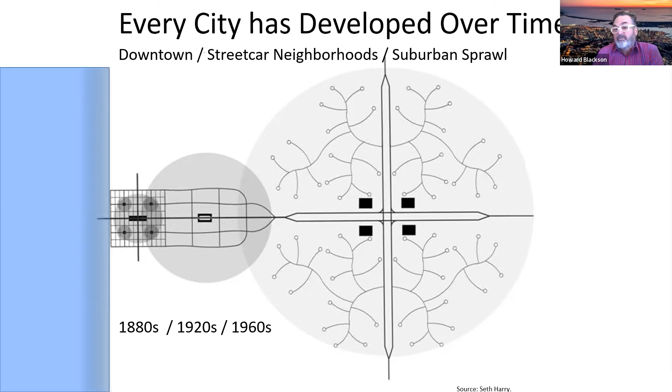You can see it in this image here: the historic downtown, and then the streetcar suburbs surrounding Balboa Park. I don't mess with the rest of the stuff out on the edge past Mission Valley, just because it's a different pattern, it has different rules, different techniques, and needs a different approach and different innovations — which we really haven't started doing yet, but that's coming, because we're still in our 10 years of mixed-use walkable urbanism era.

So I want to talk first specifically about downtown and vertical placemaking — the idea that we are in a new era, that we are not built out, especially downtown, and that over 100 years we've built a new context. What's encircled is the Santa Fe Depot, which was one of the bigger buildings in downtown 100 years ago, to today where it's obviously one of the smallest buildings.

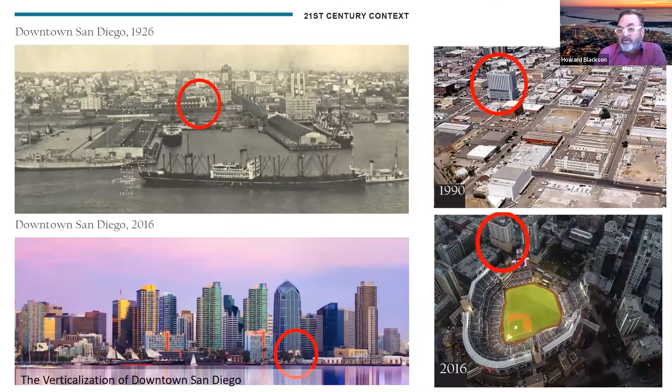There's a new vertical context that we never had to deal with before in the history of mankind — steel, glass, industrialization. You can see it here again in the ballpark village. We were doing it, we've been doing it, but we've been using the same 1890s technique — H.H. Richardson and Louis Sullivan's idea of how do we deal with this new building technology.

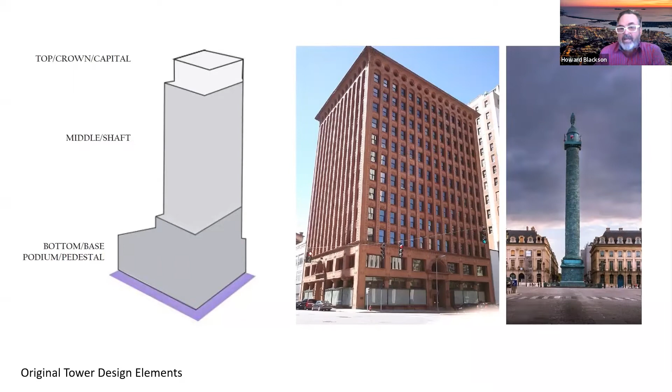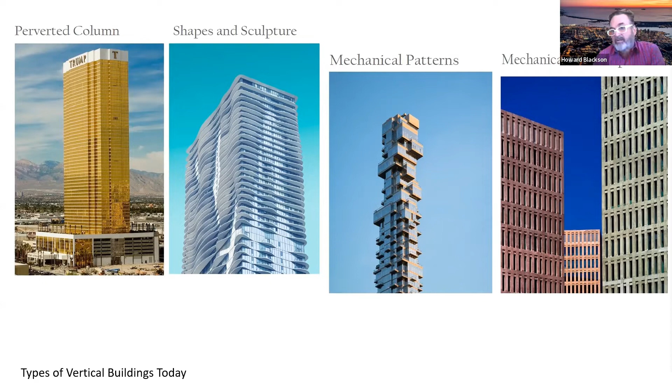We just used the old column, with a cap and a middle and a base, copying the classical idea of a column. And then we've created all kinds of different ways of doing the dumb column — the sculpture, the mechanical, the repetition, the perversion. I like that joke. And what it truly is, is vertical sprawl — it's a cul-de-sac in the sky.

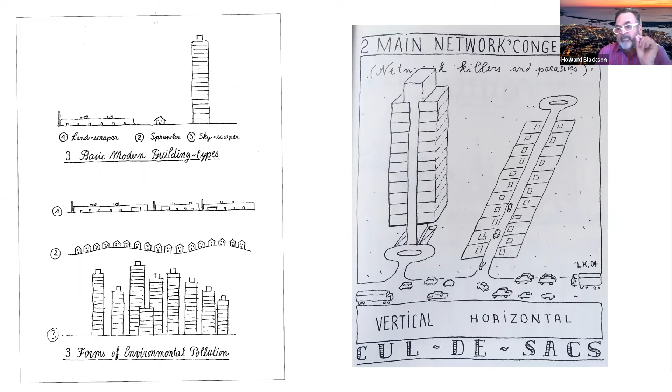It's no different from the giant warehouse building or the endless subdivision, or the vertical subdivision straight up, because it's just one size fits all. It's a congestion maker.

I am the declared new urbanist here in San Diego, and I use the transect, which is based upon—thanks again, Mike Stepner, for bringing Peter Calthorpe to San Diego in '89 to look at the transit-oriented development guidelines, because we had transit in '81.

We are able to use this pedestrian shed to show us place types, and we have different places. The beach is different from the woodland, which is different from the mountain, and they're all interconnected, but each one has its own habitat that's complete. Same goes with the human habitat.

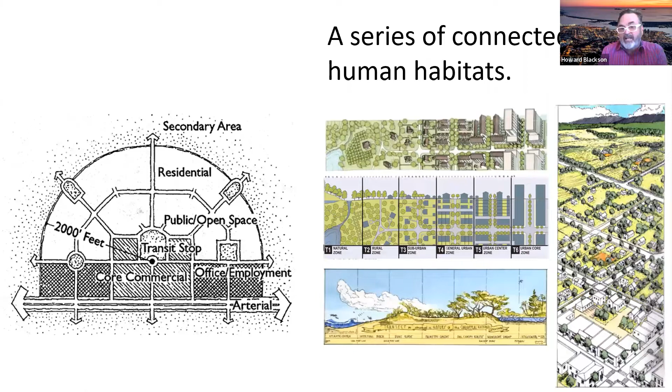Now that we've had 100 years, a century of this new vertical city building, we can now look at connecting habitats vertically as well—human habitats, looking at the base, the middle, and the top differently, rather than suburban sprawl, but as a series of place types.

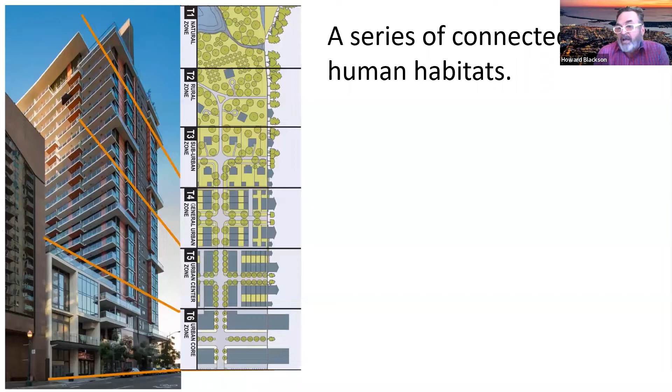My inspiration comes from places—the latest trends are fitting into this idea as well. The High Line is the old trend everybody talks about, the reuse of the facility, but what the High Line actually does is bring a civic public realm to the upper floors and connect them through a streetscape system above the street.

Now it's probably still a little too close to the street, but in New York it can be filled up. You've got to think about stretching that out vertically as you move into less urban areas—spaces as places. COVID has helped us see streets as a completely different facility than they were before.

Streets used to be mostly for cars, maybe a bike lane and a parklet. Well, now they're for shopping and commerce and everything. The idea of the 15-minute city has taken over San Diego, and the community plan updates are all 15-minute city studies, because out of Paris, it's very trendy.

I didn't show, when I showed that picture of San Diego earlier—the whole aerial—I actually like to go through that picture and show all the planning trends: Central Business District, downtown ballparks, Vancouver towers, giant central parks. We've followed every planning trend, decade by decade, and we're still doing it today.

The Barcelona SuperBlock is another trend that's going on that's very important for San Diego as well, which says not all streets should be one-way, 60-foot or 80-foot wide rights-of-way that blow through downtown regardless of context. You have different streets that perform different functions, ranging from more mobility—complete streets—to less mobility, a pedestrian street, or just a car street.

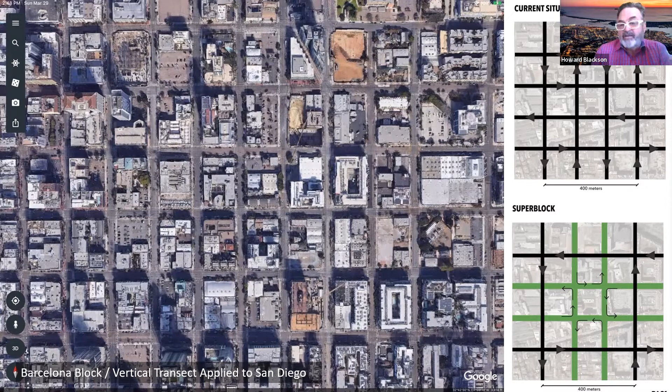I try to apply that to downtown. This is a typical block in downtown, where the current situation is mostly high-speed one-way streets, and I'm saying no, we should have some green streets, some transit streets, some complete streets. That allows us to look at the blocks a little differently.

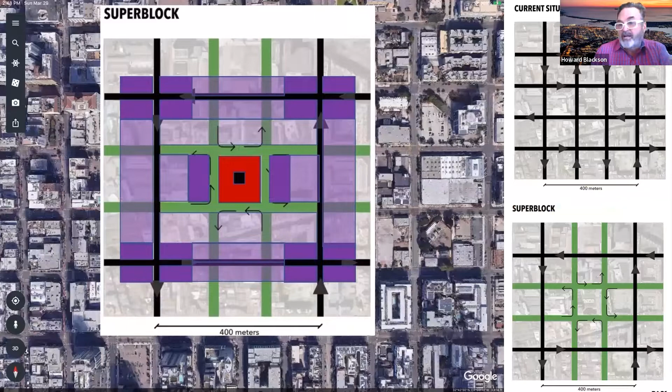That allows us to have higher intensity at corners and lower intensity in the middles, and higher intensities around new park spaces, and come up with a vertical sort of plan.

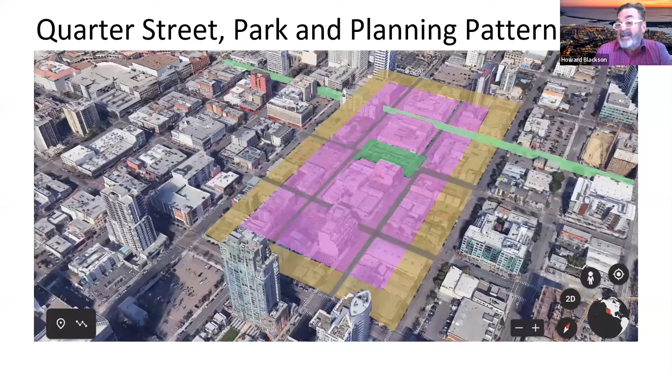I applied that very basic premise to an actual 25-acre block, a quarter of a full Barcelona block, but you can see it has a green street, a Broadway, a transit street, a Market Street, and then pedestrian streets and new corridors. You're again able to go vertical, and that verticality means the base—the first 4 to 6 floors—relates to the street, to the street, to the street.

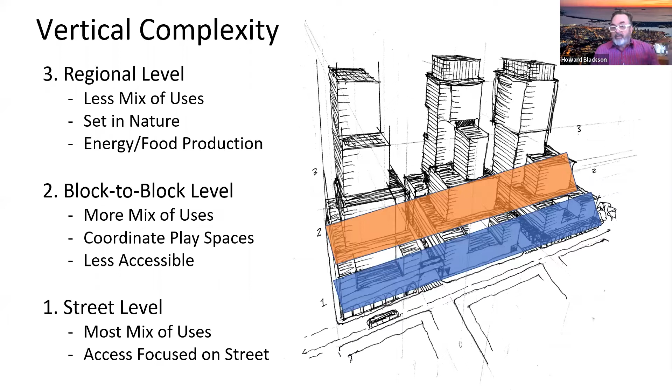We all know you've got to get the street right, but we kind of leave everything else to chance with the design guidelines. Now the next layer should be the block level, where your relationships go to the block across the street from you, so your party room fits with their party room, your work room fits with their work room, so we're able to have harmony within our building types.

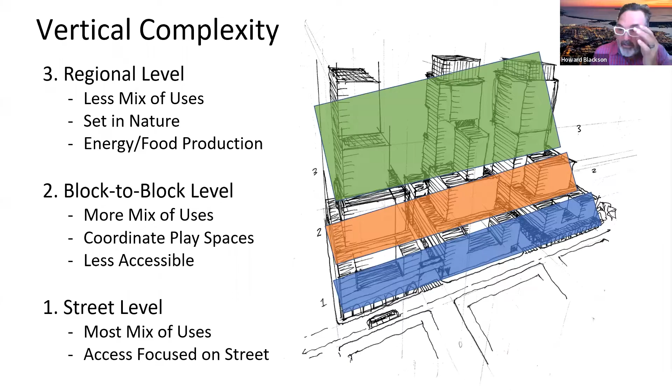And then finally, the top is more like agriculture land, where you have a few units set out in nature, set out in space, but you can generate electricity, you can have habitats, you can put all kinds of more industrialized uses on the upper floors—beyond just a penthouse or a second, third home.

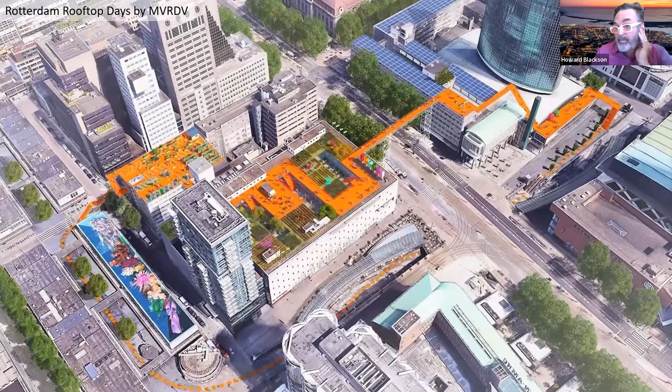In Rotterdam, there's this new Highline idea, which is really just understanding that pedestrian tube that runs across the first floor does not work. It kills the street. But if you lift it up to the next level of walkability, the first 4 to 6 floors are walkable from the street. The next 4 to 6 floors are only walkable from the elevator or the access point, and that's what Rotterdam is beginning to study here. And then the next floors, 8 to 12 and beyond, are of a different mobility and different length. So this is a new project that's going on in Rotterdam.

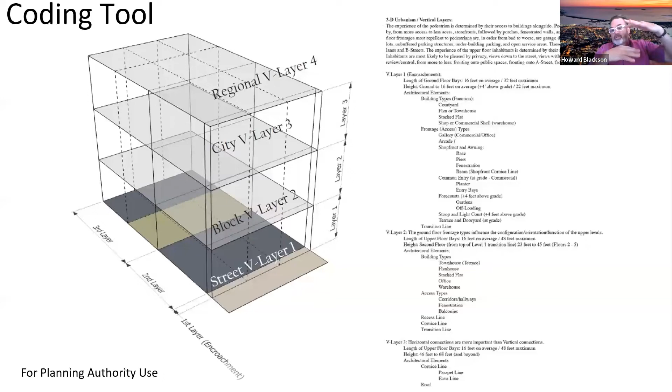But the beauty of this is it's not design guidelines. I can make objective design standards with streamlined permit processing through, don't say it, form-based code, and am able to zone a plan for layers within the buildings at the horizontal level, front, middle, back, and the vertical level, street, block, and beyond. That's the way to do the action, though, is it's happening right now.

There's some really great financially backed mixed-use mortgage ideas going on with the new Biden campaign, which is necessary. The problem that you have is our financing mechanisms don't allow for mixed use as well, which is why you see that little layer of retail on the ground floor and then one use throughout. We have to fix the financing. And oh, by the way, San Diego has a history of fixing the financing.

And then you understand place types. And then you understand the market shifts, the innovation districts, the life science centers, the tech hubs, the remote working place, the being outdoors. That's idea number 1. That was the longest one because it's the most radical in my opinion. Number 2, I only have 2 more after.

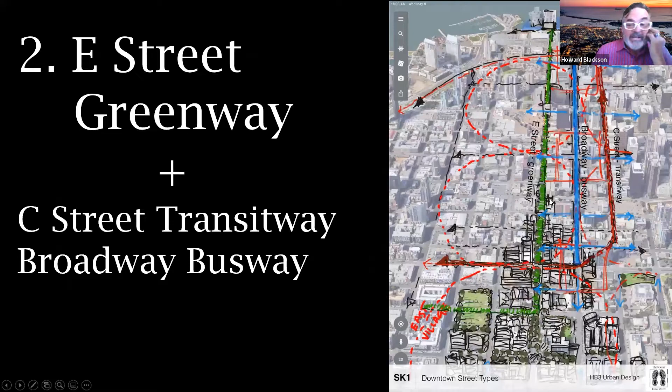I only got 4. And so the next one is an E Street, I call it a greenway, that goes along with the C Street Transit Way, which is where the trolley is, and the Broadway Busway, which is where all the buses are. And then we need this greenway. So what happens is we end up with this really nice Centre City multimodal corridor.

And this corridor is actually the spine of downtown that leads to these larger sub areas in East Village. We can make East Village have more than one area. We can have the Gaslamp and the Marina, and Little Italy, and Little Italy now seems to extend all the way over to Cortez Hill. But these different areas are able to subdivide and plan smaller quadrants of downtown rather than one size fits all, with a series of parks, a series of bayfronts, and a series of corridor types.

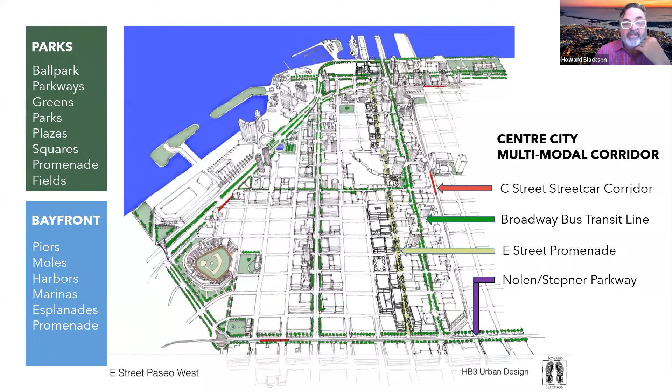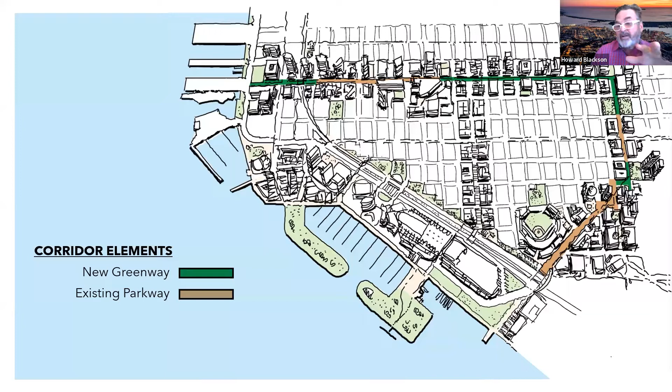And the way that I would approach it first is with E Street. There's already existing greenway areas where the area from Horton Plaza is a plaza, then it goes to the Federal area, then it stops at the train, but then you have E Street, which is a really bad one-way street that's all very fast and silly, that connects up with the Nolen Stepner Parkway down 12th, that hooks up with the Nolen Stepner Parkway down to the waterfront over here, and then goes up Harbor Drive again.

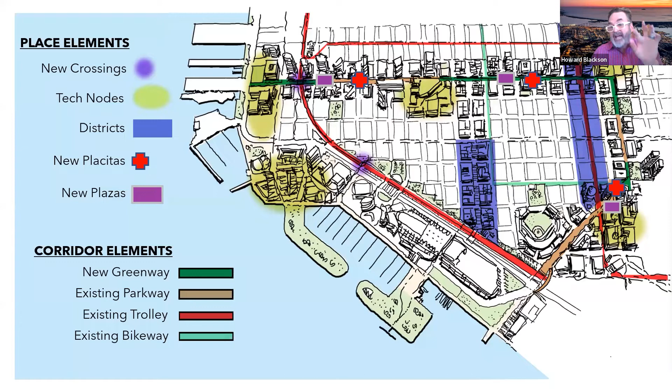So then you're able to have new crossings at the trains over the train tracks. You're able to connect these new entertainment and hub districts, and then you're able to create a series of plazas and placitas and small different types of plazas, small different types of greenways, and you have a series of places that actually activate each one of these sub districts.

It only costs about $50 million to put together. I didn't show you that we already have $25 million earmarked for it, but it creates these connections, these design principles of a continuous thread of design, a series of interesting places, and connections to everywhere else.

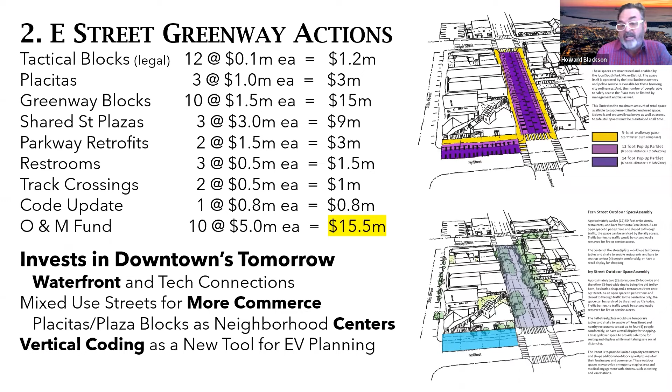These mixed-use streets equal more commerce. The neighborhood centers come with public parks, and then you can use the open streets to understand how to close down entire blocks of street, or half blocks. Then, of course, you use the vertical transect coding tool to plan how these buildings relate to these three different street types.

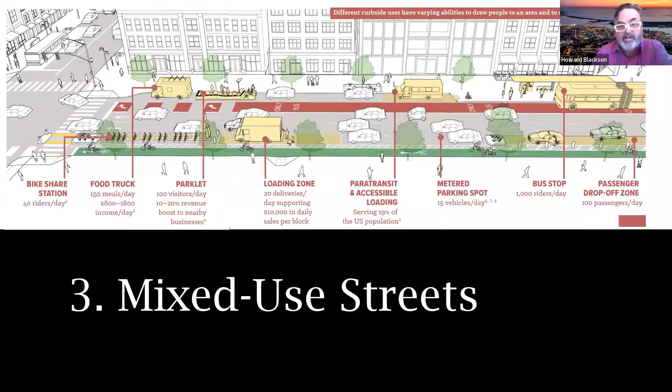Which leads to stop thinking about streets as traffic streets. Think about them as mixed-use streets, like we demand mixed-use buildings. We have all these mixed-use buildings, but we put them on 35, 40 mile an hour one-way streets, and it's scandalous. We should be embarrassed that we demand mixed-use buildings and put them on 1950s one-way streets.

We don't have alleys downtown, so we do service on these one-way streets, such as E Street here. We're adding bike lanes, and it's making everybody nutty and crazy because there's no real thought - it's either this type of street or that type of street. They need to be mixed-use streets.

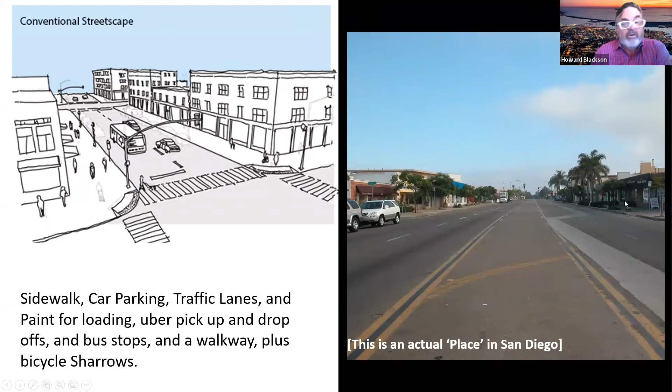I'm just going to show this again because this is scandalous. So this is the conventional streetscape, an actual place in San Diego. We should be embarrassed, because we understand streets have different mobility zones, different speeds.

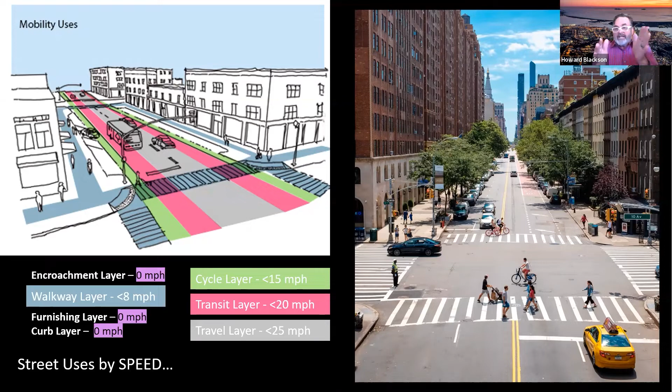The speed on the sidewalk is less than 8. The speed just off the sidewalk, where the stopping and starting, curb management, and bicycles happen, is 0 to 15. Then you have the streets in the middle that give you higher speeds - it better not be over 25 downtown, but they are.

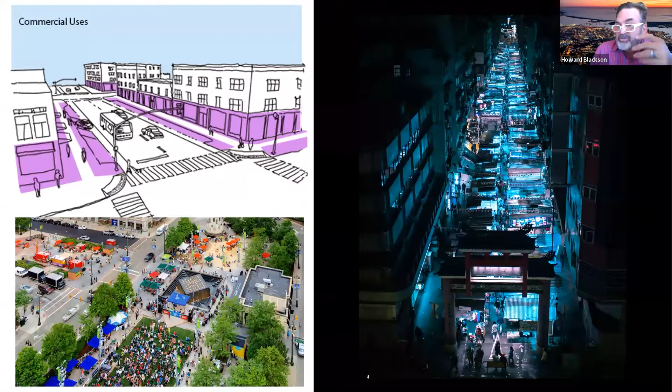Then you have commercial uses. We understand we can manage this. We can add commerce - we've done it, we do it. We can also add live-work, and we can build over and encroach into the streetscapes, especially in our very urban areas.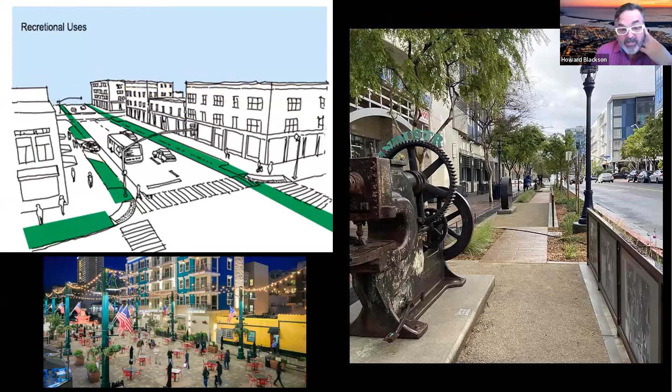They don't have to be suburban wide streets with a median down the middle to keep cars to the side - push closer to the buildings. We can push the buildings closer into the street and have residential hotels, we can have live-work, and also recreational uses, greenways, plazas. We've already started - we've got the new parkway on 14th Street, which has no benches.

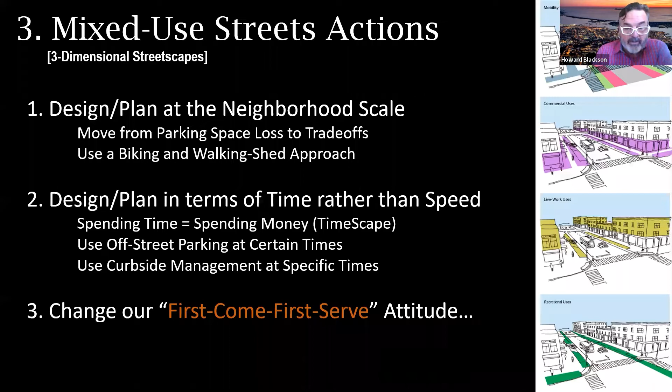The idea of mixed-use streets means we have to stop this first-come, first-serve street attitude - I'm parking here, I'm driving here, this is me, I'm first. You have to understand these need to be as managed as the mixed-use buildings you're trying to get throughout our transit corridors. It's that attitude of me coming first that's killing us, but that's very American, which is why the flags are upside down in front of my house today.

Finally, I'm not going to talk much about the homeless need for safe camps, because safe camps and downtown partnership are 100% right, and we should be fighting for safe camps to help homeless people get off the sidewalk and into a triage center to help them. The downtown partnership is right in this.

In a city, the new vision needs to be about a city instead of a city of villages, which is very old - that's been around. It's time for a new update. Call it a city of transit corridors, because we're planning everything around these transit priority areas - everything: parking, mix of uses, waiving of zoning, affordable housing.

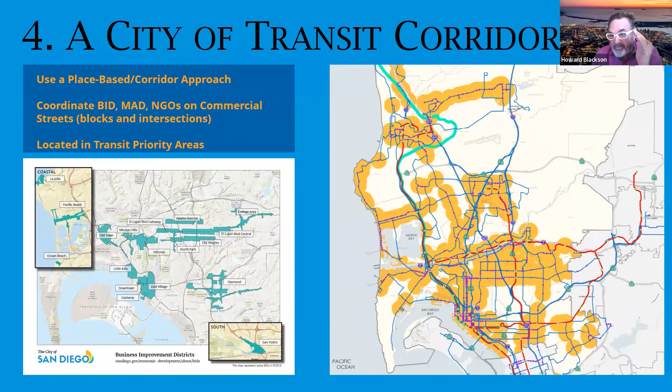This is also where our business improvement districts run - you can see a map on the left, showing they run along our corridors. These business improvement districts are not coordinated, and they actually got funding cut, just like the safe camps had their funding cut and then put back in last week. But business improvement districts are extremely valuable to help us plan locally, but also develop.

The business improvement districts are the people who know who's going to sell. They know the families that own the buildings. They know the tenants that are moving in. They know the marketplace.

They know the lots that are available. We do that if we use zoning ordinance and community plans to master plan our city. We're going to be waiting again for another 50 years for 12,000 units a year to be able to build ourselves out of this housing deficit that we're in.

So the Enhanced Business Improvement Program is not a new idea. Teddy Cruz came up with this and these images 15 years ago for Casa Familiar. But the idea is that the NGO, the Business Improvement District, is the liaison or curator between the government, financing, and the community and local people. So the NGO, this is the Casa Familiar, is a micro policy facilitator.

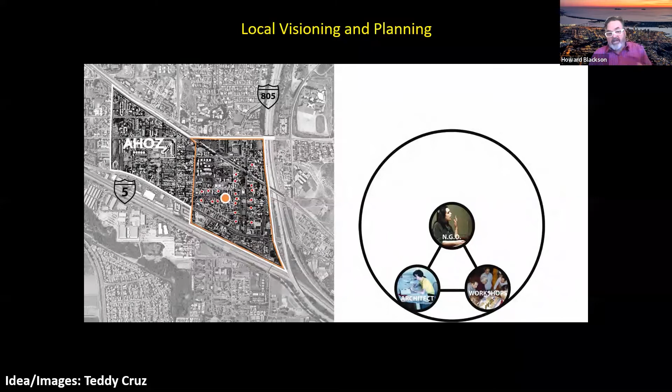They help to come up with design, they help communicate with the public. They help come up with the standards and the ideas of what this community, this corridor is going to be. And then they help with financing. They help curate sellers and buyers and investors and micro lending, the models that you can build that are permitted, and permitting and streamlining and all of those rules. They can help make this happen.

They can also work with trade unions and job training, and the chamber, to help facilitate San Diego's chamber labor battles. Because at the end of the day, if you're able to zone for 3, and we understand complete communities are everywhere, you can get 12 and beyond units today. That's great. But if you don't have the local people or don't understand that they're able to build this stuff, they're just going to wait for somebody from New York, London, or Tokyo to invest in it.

When in fact, one of the greatest values in San Diego is land and development and construction. And we should be, in order to compete for jobs for local San Diegans with the world's tech center and the world's life science engineers from all over, we need to be able to help people understand how to build and how to construct and how to develop their own properties in their own neighborhood, their own land.

And oh, by the way, there's groups that do this. The Incremental Development Alliance does it. And they work with unions and they work with the labor to help them understand how to get into the business of it. And the state is forcing this hand.

The state, Peter Calthorpe, who we mentioned earlier, is leading this AB 2011 that's gotten through Assembly and in the Senate, going to the governor's desk, that says all commercial corridors are going to allow mixed use, all commercial corridors are going to allow housing by right with streamlined permitting, especially if you use labor. And so everything that we're talking about is lined up at the state level and forcing it down because we're just not doing it at the local level.